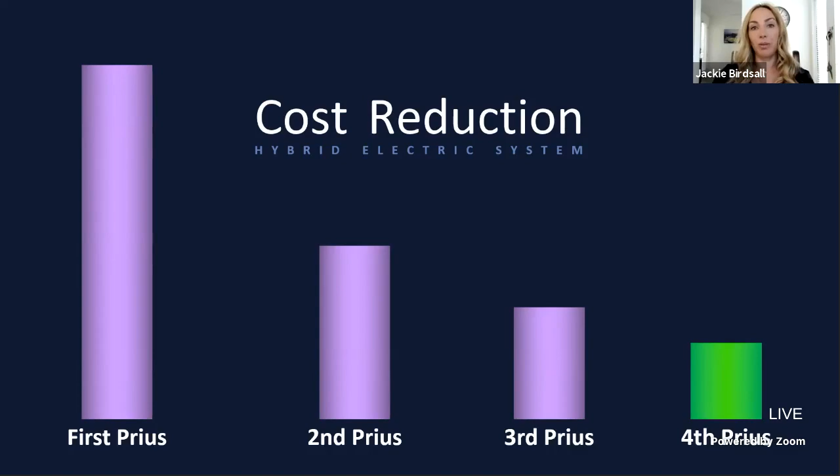This brings me to the first generation Toyota Mirai. For those who don't know, Mirai in Japanese means the future. Prius meant to go before, Mirai means the future. So to us, this was really a core technology and a huge part of our decarbonization strategy.

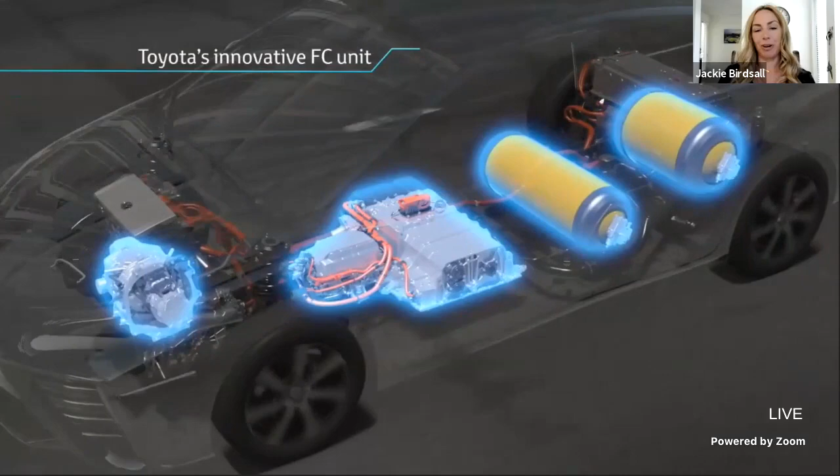I assume most people attending this conference already know how a fuel cell works, but just in case, this is a diagram from our first generation Mirai. It is a hybrid vehicle, but instead of a gasoline engine, we have a fuel cell stack which combines oxygen and hydrogen to create electricity that powers the electric motor. Instead of refilling with gasoline, we refill with hydrogen.

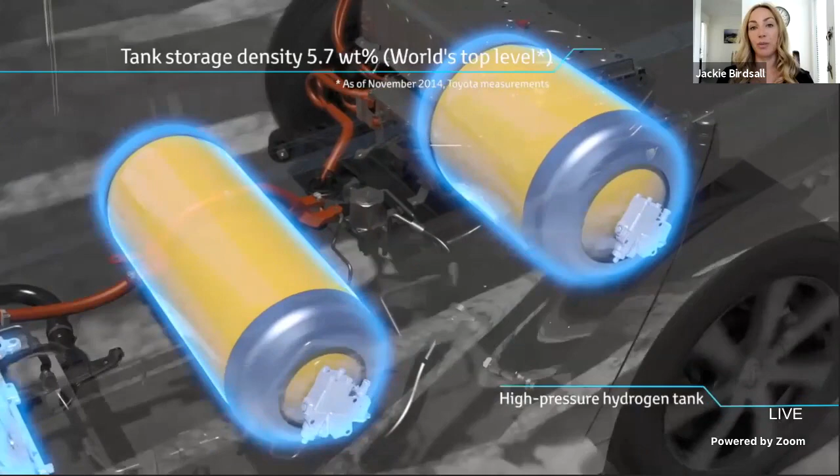It takes about 5 minutes to refill. Our current generation Mirai goes 402 miles on a fill. We combine that with the rest of the hybrid synergy drive system, which is the power control unit, the electric motor, and the battery.

This is something to keep in mind as we talk about other applications beyond the light duty market, because it's not so difficult to swap in the fuel cell system and allow for that quick refilling time, and to allow fuel cell electric technology to be an option in many different types of platforms.

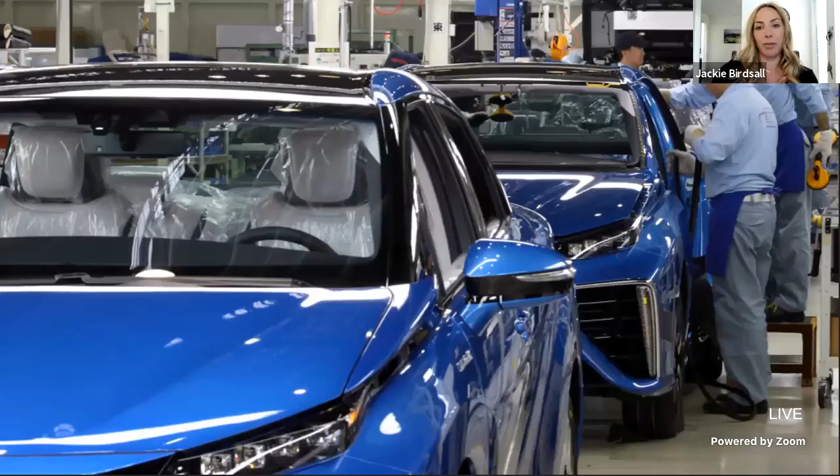Between the first generation and second generation Mirai, we had a lot of learnings. We reduced cost, improved efficiency, decreased the size of the stack. We're going to see that continuing trend into our next generation. We've also improved our production capability by 10-fold, meaning we can make many more fuel cell stacks than we did previously. This opens the door to so many other options.

Customers really love this vehicle, and we've seen huge customer demand in response to sales. We are tempered by the hydrogen infrastructure, which I'll let some of my colleagues on the panel and others throughout this conference speak to. But really, it is a close marriage between vehicle sales and hydrogen infrastructure.

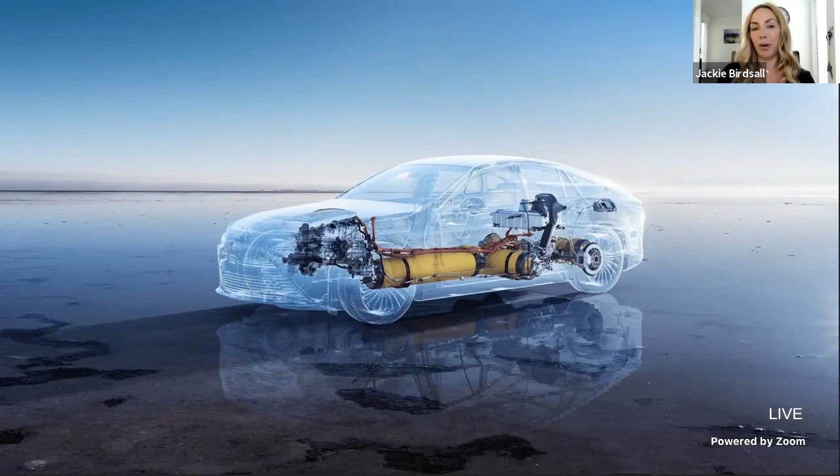With this vehicle, we also increased the hydrogen capacity on board, improving the range to 402 miles. We've moved to a rear-wheel drive platform. This new fuel cell stack that we're using to power this vehicle is one we can use to power many other applications, which I'm going to get into.

I already touched a bit on hydrogen infrastructure. Currently in California is where the majority of vehicles are sold in North America. We have 49 stations, with intent to have up to 100 by the middle of this decade. We think that will really help serve our customers, build redundancy, and address some of the issues we're seeing with the current fueling infrastructure, which I'm happy to answer questions about later.

Why did we do that? Well, it's the 9th largest port in the world. It has 16,000 diesel trucks coming in and out every day, picking up goods from the marine vessels, taking them back to the rail yards. And because of this, the local air quality is significantly impacted, as well as the health of the communities, with higher rates of cancer, higher rates of asthma. So we saw this as a gap, a big opportunity for us to step in and remove these diesel engines off the road and try to really improve the quality of life for the communities around the ports.

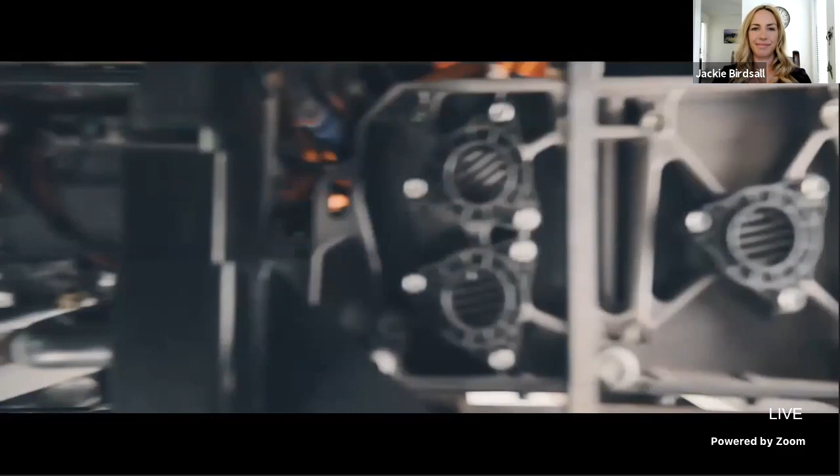All while emitting no smog, no soot, only pure water. In this world of big trucks, innovative technology can make them cleaner, quieter, and more productive than ever before. This is just the start of Toyota's vision for a world where innovative technology helps reduce our impact on the environment. This is Project Portal.

And let me tell you, that project just completely took off. And as with everything else in the decarbonization space, in the hydrogen industry, we can't do it alone. So we have this incredible group of partners that put in a total of $82 million into this project scope to make sure that these first 10 trucks happened, and they are all on the road now, working in and around the ports, pulling up to 80,000 pounds of goods, and doing that with 0 emissions, which is really phenomenal.

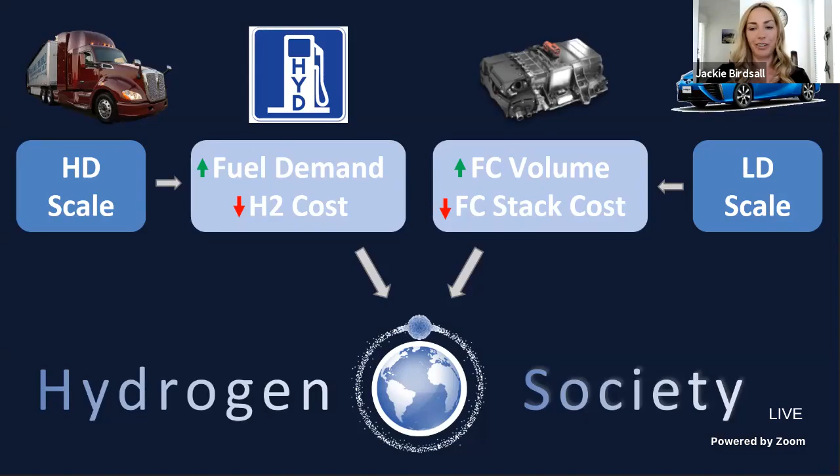And again, I can't speak enough to how much excitement this truck has generated and has really opened the door for us to look at other mobility applications where we need to, once again, decarbonize and replace gasoline and diesel engines with fuel cell technology. So other spaces that we're investigating include buses.

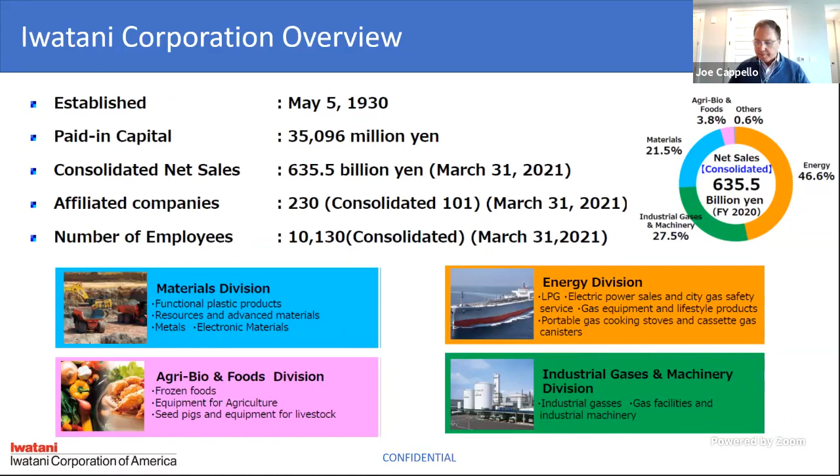We are also Japan's largest producer and distributor of hydrogen. We have a vertically integrated platform. We import just about all of our raw material, predominantly LNG, which becomes the feedstock for our hydrogen production facilities. We have several hydrogen plants around the country, liquid hydrogen plants, as well as gas transfills that enable us to distribute and deliver hydrogen throughout the country.

In addition to the plants, we have various degrees of transportation equipment, both liquid and gaseous hydrogen transportation equipment. And while the focus and excitement is around helping to transform and decarbonize the transportation sector, there are many industrial applications as well.

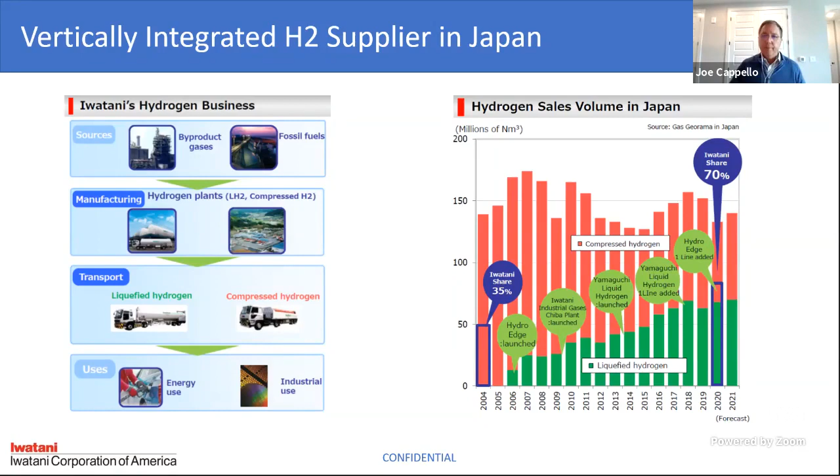In the background, we have plants distributed around the country. A couple of exciting projects we're involved with are looking at manufacturing green hydrogen, brown hydrogen, gray hydrogen, in a way that's able to capture and sequester carbon dioxide, creating a very low carbon intensity hydrogen.

We've also invested as part of a consortium in an exciting transportation project with a new liquid hydrogen carrier that's on its way from Japan to Australia as we speak. The idea is to bring extremely large quantities of hydrogen from Australia into Japan, but also to look at ways to perhaps do that from other destinations as well.

An area we'd like to point out - most folks probably understand what happened at Fukushima several years ago and the closure of the nuclear plant there. Well, Iwatani is part of a pretty large consortium that's converting and reimagining that area into a CO2-free hydrogen production site using renewable sources to generate hydrogen. It's a pretty exciting project.

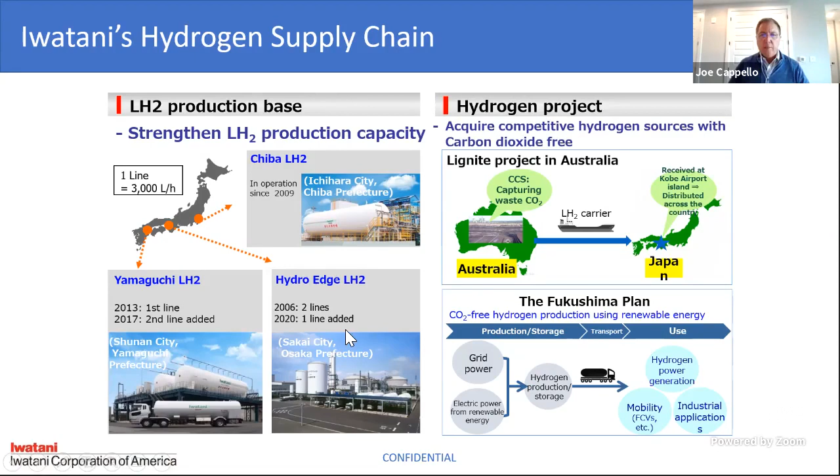I mentioned all of this around the supply chain because it's all required to support the mobility market that we've established throughout Japan. You saw in Jackie's presentation a bus at one of the Iwatani stations. We have more than 35, and soon close to 50, stations throughout Japan where we're able to fuel light, medium, and in fact we are testing heavy duty vehicles as well.

As we looked at ways to expand beyond Japan, we're looking at markets throughout the world. What I'd like to talk to you about is some of the things that went into the decision-making process for selecting California as one of those locations to participate in the infrastructure build-out.

Europe is certainly an attractive market with huge momentum, but we honed in on the California market. California, as we see it, if we're successful there, it's the fourth largest economy in the world, and it's a pretty substantial investment opportunity given California's commitment to decarbonization.

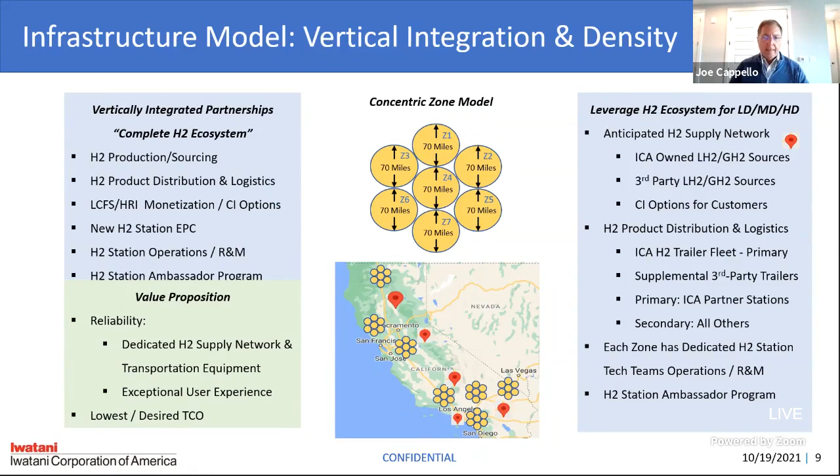Here's an example of one of those circles within the DAISY, if you will. We announced that we have a very exciting program with Toyota and Nel. We're building out a series of 7 stations in our first zone, called the Futurity stations, which will be online in 2022. They're 800 kilogram a day stations, able to serve customers with 2 dispensers at each location. So it'll be a step change from the current technology we have deployed right now.

I mentioned replication. So light duty and heavy duty markets, California being the first step, but there are lots of transportation corridors we anticipate being able to serve. And as the expansion of hydrogen takes wave, as more states develop their programs, we see an opportunity to continue the hydrogen wave from west to east.

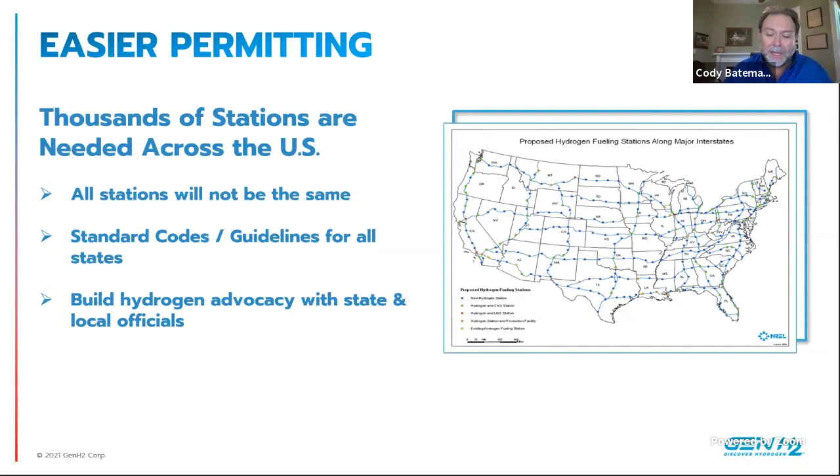Well, the simple solution is through education. As I mentioned, many local governments are very hesitant to add stations. Everybody attending this summit today understands the safety of hydrogen and how it can be significantly safer than even gasoline or diesel. But some of that education has to go out to the smaller levels, to the smaller cities and counties. So we have to take a multi-leveled approach to our education.

First of all, it is going to be required nationwide. I believe the education setup that's been successfully done in California needs to be rolled out to other places sooner rather than later. Secondly, the initial education has already started, so we can leverage a lot of the education that's already been put in place.

Summits, all the hydrogen conferences people are going to—there's a lot of great material out there that I'm hoping we can get together under partnerships, combining this information from all these companies working in this space to further educate people throughout the United States and all of North America.

The third one is something we really haven't seen much outside of some city council meetings inside the state of California, and that's really having public forums. The focus of going out to these public forums is allowing individuals who may have hesitancies toward the hydrogen economy

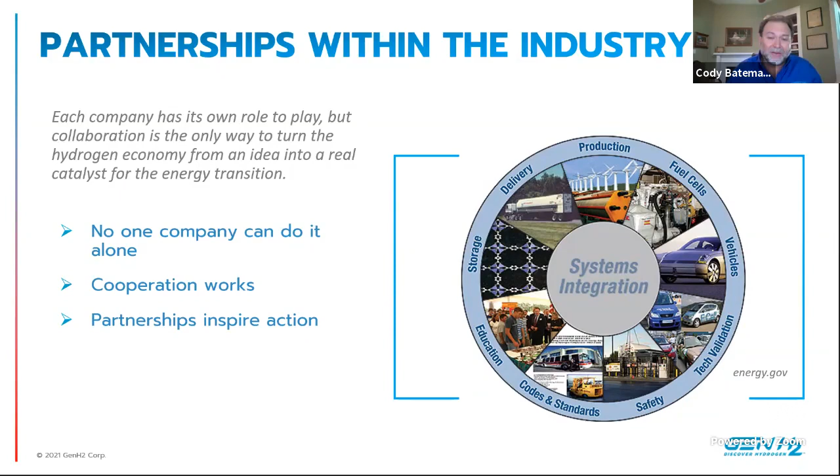The last topic I wanted to discuss isn't as lengthy as the others, but it's something that's been addressed at this conference. We've all seen it - anybody in the fabrication and manufacturing space is starting to see shortages of specialized parts. The bottom line is there are a few key components made in very small quantities today, and we have to find ways to roll out more of these smaller parts, because we can't roll out 200-300 stations if there's only 50 or 60 parts needed across all of them.

What we need is to create a true infrastructure bill and look at government support and more grants to address the core infrastructure piece - not just federal level, but more incentives at the state and local level to get people creating manufacturing sites. We're very fortunate that our new headquarters in Florida got some incentives from the state, but there needs to be a whole lot more.

More and more companies are going to need to get to mass production, and this is very difficult. We've made a lot of strides during COVID. There were questions in a previous session asking whether COVID really slowed us down, and we've actually seen the opposite. What we've seen in this time frame, especially doing more conferences online, is greater reach - we've been able to talk to more and more people. It's also enabled us to pull back in and do advanced engineering on our side, optimizing some of the manufacturing processes so we can get to mass production.

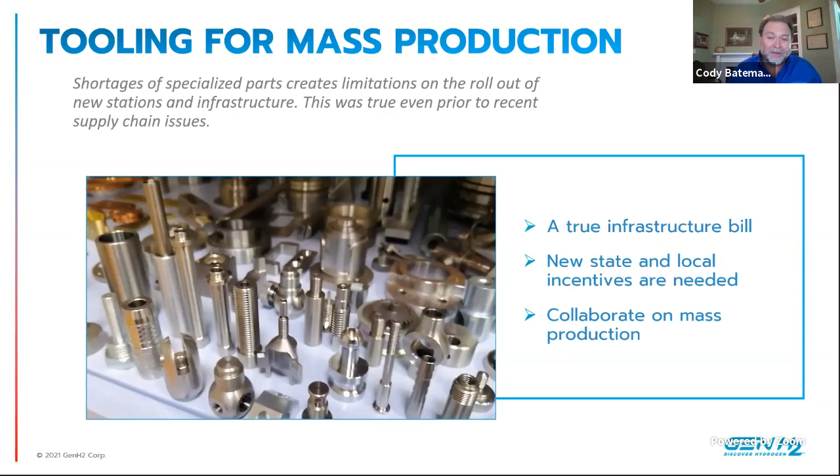That being said, we always go out there asking people to help build the hydrogen economy with us. We do that both in discussions like today, as well as outside the industry, and with state and local governments. This is a very exciting time. We really appreciate everybody coming in and listening to these sessions today, and hope we can talk to you soon and help us power the hydrogen economy. Thank you very much.